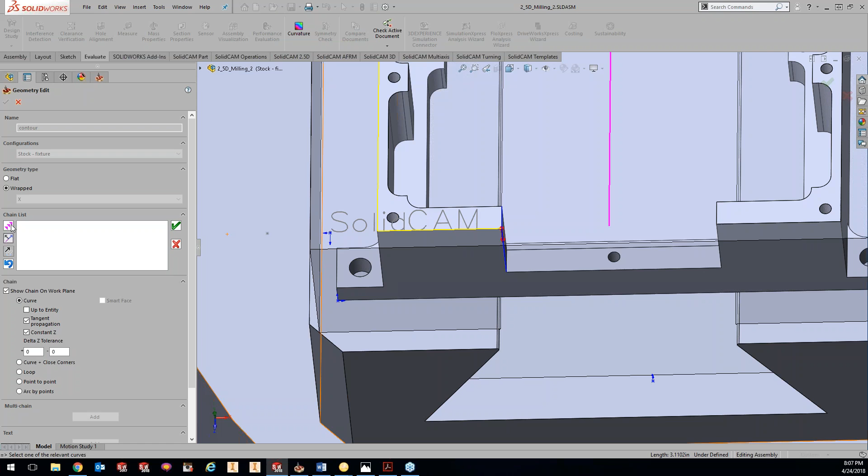But now, let's say I don't want it to go this way, I want it to go down. Easy enough. We can come over here, click the change direction, or you can hit F7, and then it's going to change the direction for you. And then you can go back and hit F6, and it's going to go through.

So you can kind of see that arrow direction. You're following that more than anything. So I'll just change direction again, continue through. So that's one way to go about it.

Stopping you real quick there, Kevin. One of the nice things about having hotkeys is if you do have one of the nicer 3Dconnexion mice, you can actually map those hotkeys, the F6 and the F7 button, to these customizable buttons on your 3D mouse.

That way you can go through and rotate your model with that 3D mouse and start selecting your geometry as you go. So it's a nice feature that I've mapped on mine, and something you guys may want to play with as you program out your parts.

Yeah, that's a great point, because time is money when it comes to programming, and the sooner you guys can go through things—just like when you guys are creating your SolidWorks models, those hotkeys really help you out speed-wise. So definitely map those out.

I'm currently running the 3Dconnexion SpacePilot Pro.

Greg, I think you're running—which one are you running? Are you running the Pro? I think I'm on the Space Pilot First Mate. First Mate, okay. So yeah, definitely you guys set that up on your buttons, and I know pretty much everybody in here has the 3Dconnexion 3D mouse.

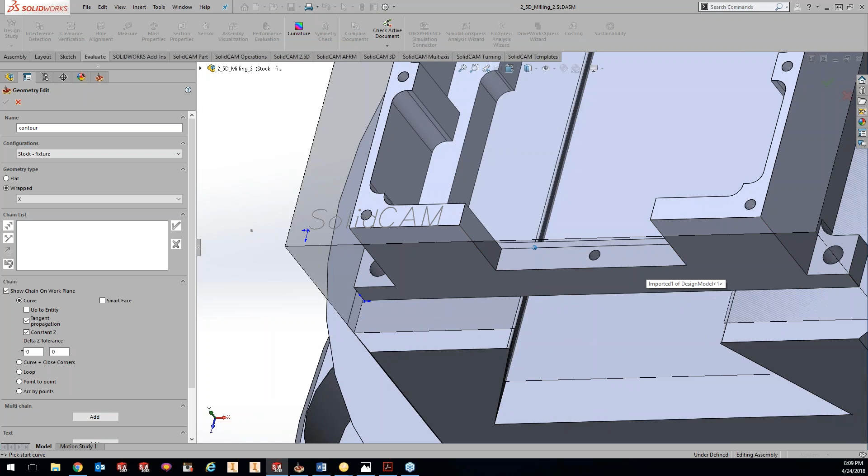Okay, so maybe we want to change the direction of this cut. By default, let me just kind of start over here. I got ahead of myself. So let's say we want to chain this right here, but I want it to go a certain way.

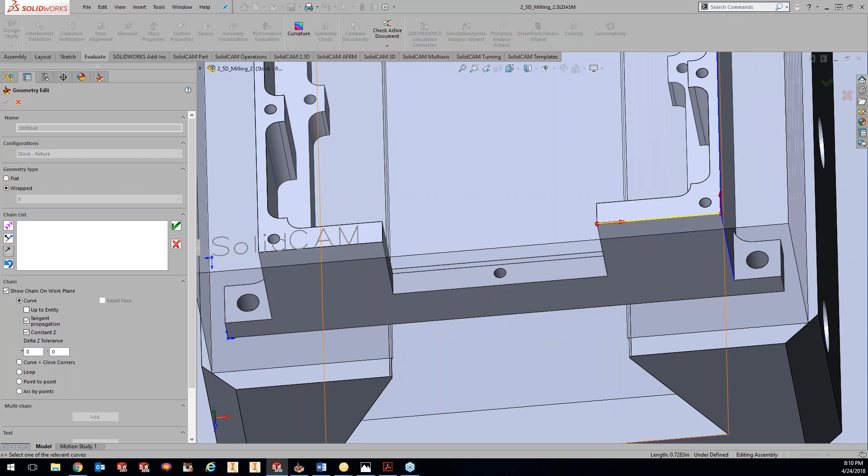Well, if I click from center line over to the left, my chain is going to go to the right. See how our arrow is going to the right? Let me just undo that. Now if I click more to the right side, my chain's going to go to the... maybe not, my chain should be going to the left. In normal situations, it would be going to the left. Let me hop out of here real quick and get everything refreshed. All right, we'll hit new here.

Okay, so if I hit over towards this way, there it goes. My chain will go left for me. So it all depends on where you click.

Now let me delete that real quick. Let me turn off this tangent propagation constant Z. Let's say I accidentally clicked the wrong direction. So this button over here, the reverse button, will reverse your toolpath. So if we hit F8 or click the reverse button, you'll see how my chain direction switched over.

Now, chain direction does not matter with iMachining, but everything else does. So you always want to make sure your chain direction is going the correct way, because that is the way that your end mill and face mill and all that stuff is going to follow.

And then we also have the oops button. So you can hit the undo button or hit the backspace, and that will just undo that chain for you guys. So, any questions with the chaining options over here?

All right, so let me chain this one around here real quick. Let me show you one more thing in here.

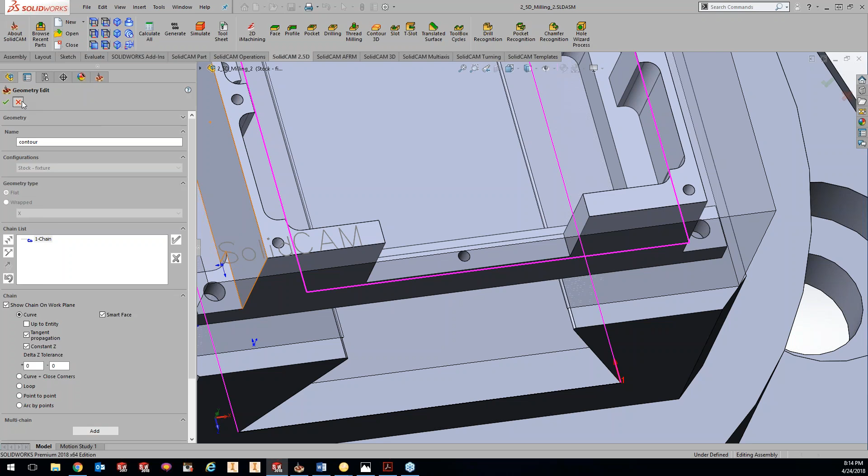So if you guys have a sketch, let me do one up real quick here. Sorry guys, I should have had this a little bit better. So let me zoom out here,

and let's just do a sketch. Let's do something like that. Exit sketch, and we'll do a pocket, new.

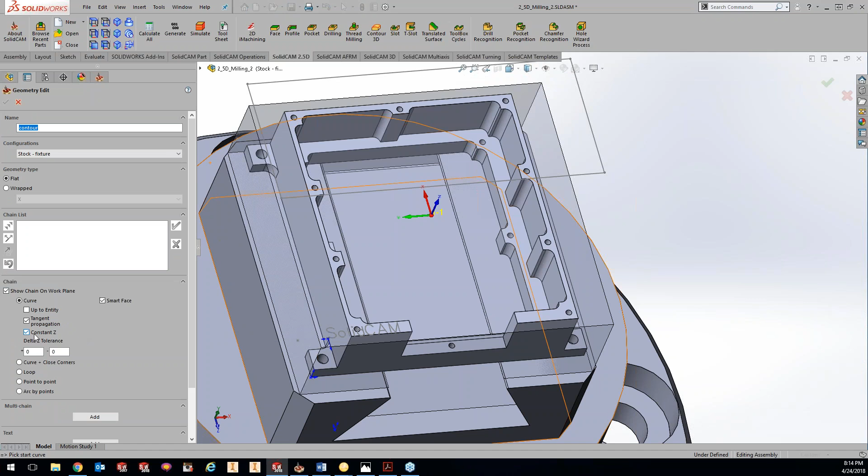So if we do something as point to point. Now this is like if it's missing geometry and you just have points, and I'll talk about the point to point. But if I come here, do point to point, and sorry guys, my mouse just fell apart. The little trackball had rubber on it.

Okay, so go point to point. We got a chain there, chain here, chain here. So now we have our closed chain, but if I come in here and do mark open edges, since I've picked a sketch, I cannot mark those open edges at all.

So what you guys can do is, if you have, let's say I want this one marked as open edges, there's 2 ways of going about that. We can mark the entire chain as open and then come back and do the wall like I was just talking about, or we can use the select entity, the from-to entity, so from here to here, I want it open, and it will open up that slot for you guys. Just one kind of little trick right there, using sketch geometry with point to point.

Okay, so I was waiting for Andrew to pop in, but I think he must have forgotten about us tonight.

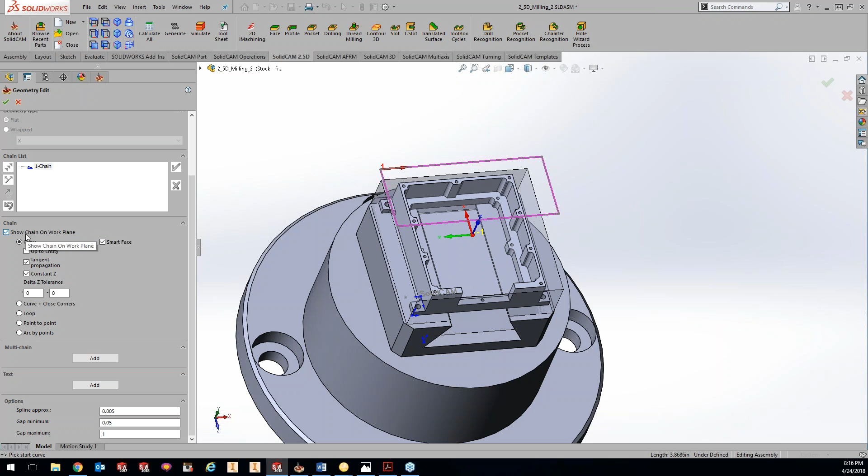Okay, so now as we're going through it, let's focus on the chain section right here. So this chain, show chain on work plane. What this is going to do is produce - let me just delete this, yes - and we'll chain this guy right here. So what that is showing us is the chain up on top in purple.

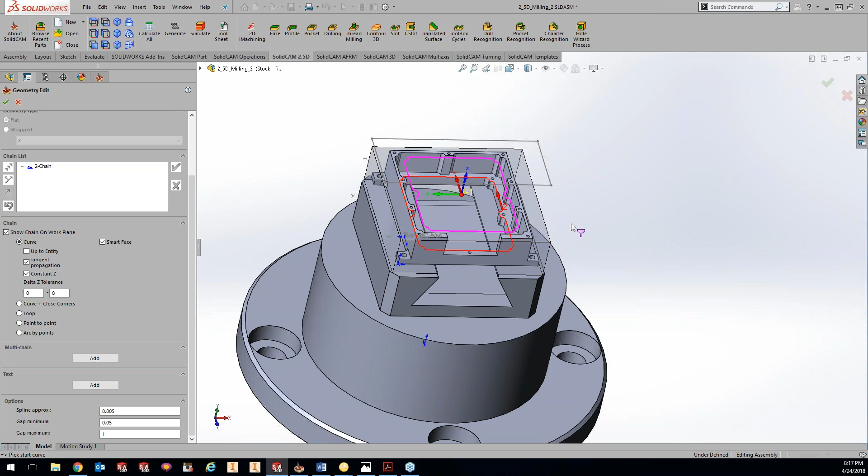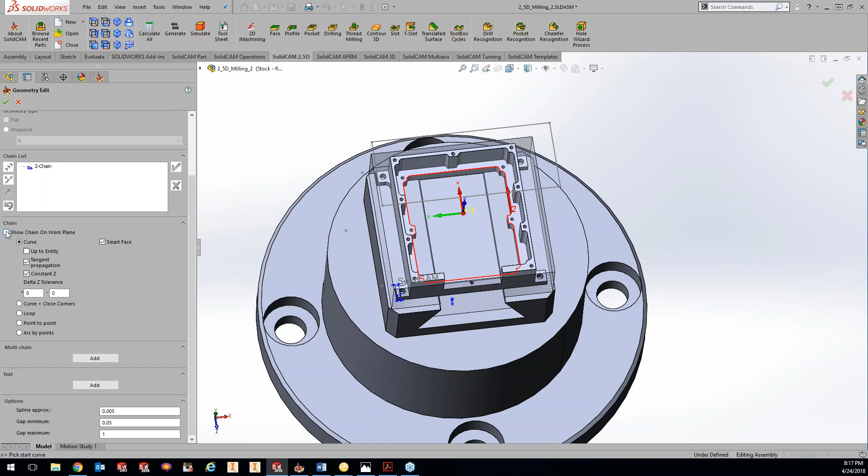Now, this will throw you for a loop. Personally, I don't like it, but it shows you the plane there. And the only reason why I say I don't like it is if I come and mark open edges on this, and if I'm looking straight down on it, clicking that mark open edges, it's still showing pink when the open edge would show black. So this is something you guys can turn off just on this particular case. I can come in here and turn it off, or you guys can go to your settings and turn that off so it never comes on for you guys.

So just keep that in mind. And if you don't like it, just turn it off in your settings. Let me hop out of here and show you guys in the settings.

Tool, SolidCAM. One of the places where show chain on work plane really comes in handy is when you're working with 3D geometry, because you want to see what that projection of the work area is going to be, since it may not present itself as well when you're working across 3D surfaces. So each thing has its place, and it's up to you to determine what works for you guys.

So here's the defaults for your geometry. If you open up your SolidCAM settings, come over to the geometry button, here is where all your settings are for that field. So let's say you want to change the gap minimum or maximum, or you don't want to show that chain, you can just uncheck it. As you're picking geometry, sometimes by default the tangent propagation is turned on and the constant Z propagation is turned on. Maybe you don't like that - you can turn that off right here.

Smart face settings, which we're going to cover next - you can do it for pocket and iMachining, or we can actually do it for profile as well. The auto depth and shift positions really don't pertain to the geometry picking itself. So if you don't like the show chain on work plane, you can just unselect that as well.

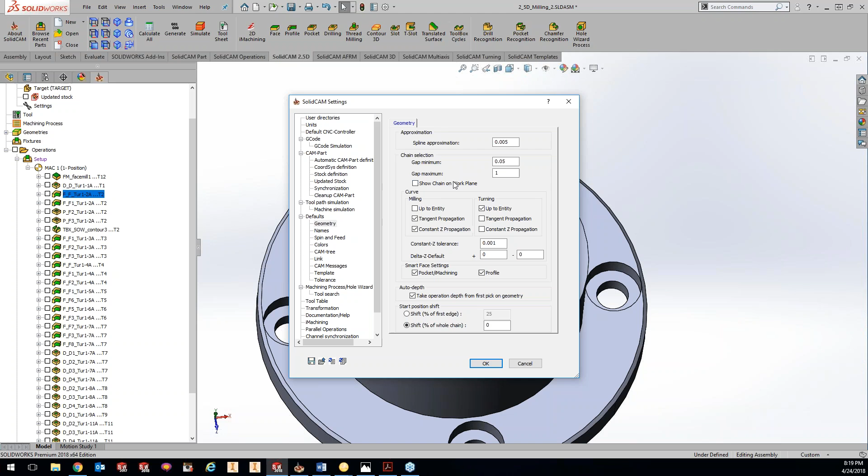So okay, let's get back in here and go to pocket, new.

Okay, I'm going to throw something out at you guys here. As we're doing these night classes, I kind of think I know the answer, but I want your guys' take on it. And this has nothing to do with our geometry - I just thought of it right now, and Greg and I were talking about it last week. As we're going through this stuff, let's say we're doing a night class on pocketing - would you guys be interested in, after I show you how to do a pocket on a certain cut or a certain cut style, seeing that live cut on the machine as well?

Absolutely, we've got an absolutely yes. Okay, so for those of you that don't know - look at that, a resounding yes. On a CNC, yep, that's right, Ronnie.

So we have that small little desktop machine. I'm going to see if I can get that transferred over from Scott's shop over to here and see if we can start doing that going forward. Scott is really attached to that machine, so we'll have to play that one by ear. But I think what I'm going to do, guys, is email you guys, and if I can get enough yeses saying we'd love to have that, I can send that. I can use that fuel for the fire, you know what I mean?

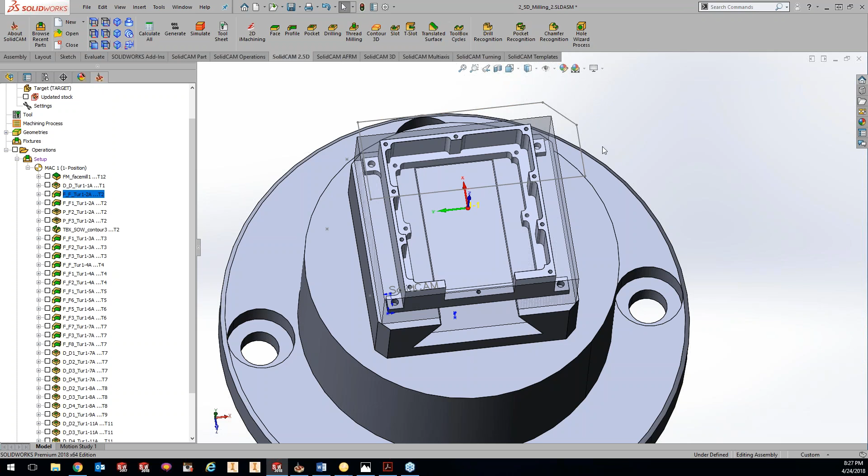So what we can do is, let's say, we want to square off that corner. Let's do profile here, new. So we can do our curve plus close corners, and I should be able to grab this chain right here. I'm going to reverse it, and I can click on this chain, and it's going to pretty much put that at a 90-degree angle for you guys.

Now, if this line is not 90 degrees to it, it will do an arc in there for you guys. I don't have a real good example of that one, but it's just going to throw an arc in there based off of how everything's put together, if it's not 90 degrees right here. This is one that, ever since SolidCAM 2007, I haven't even touched. Not a real popular one, but the option is there for you guys.

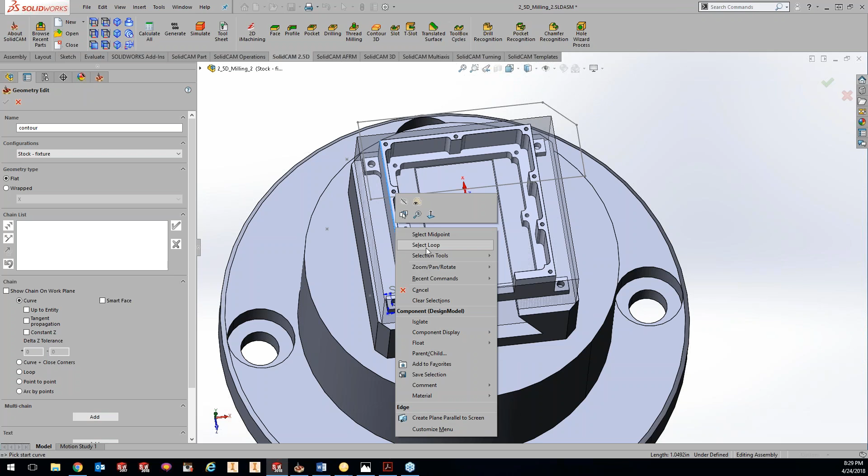All right, so let's reject that chain, and let's go to loop. For those of you guys that know SolidWorks, when you're doing stuff in SolidWorks, you have the option when clicking on something to do loop inside there - select loop right here. That's exactly what we're doing over with SolidCAM.

So what you guys can do is we can click loop, and I'll just click this chain right here. Now it's telling me that I can loop this face right here that's highlighted in yellow, or do I want to loop and chain all the stuff in blue? So let's say if I wanted to go with the blue, I can just click on one of the blue lines, and it's going to chain it up for me. So it's just grabbing that entity you've chosen, and it's going to go either that front face or the top face for you, looping that geometry around.

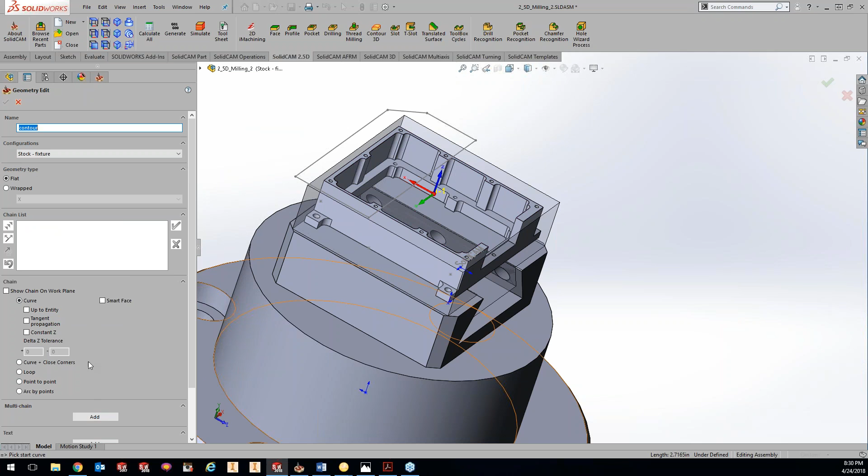Okay, let me delete that here. Point to point is one that gets used a lot - missing geometry, maybe we need to do a gap in the line, kind of like this front face right here, instead of coming down and over, or if this bottom piece was actually missing, I would have no way to connect the dots.

So two ways of going about that is I could do a sketch and just do a sketch line over here, or what we could do is I can click on that, and then I can come over here and go point to point, and I can just hop right over it. And then now I can go back to curve and grab my geometry going all the way around for us. So real easy to use, and it's just basically filling the gap for you guys.

Now, you will be able to mark that specific chain as open. So you can come over here - I didn't do it in pocket, I did it in profile - you can come over here and do mark open edges, and this is where you'd use the from-to. So we'll say from this line to this line over here, I would like that chain to be open.

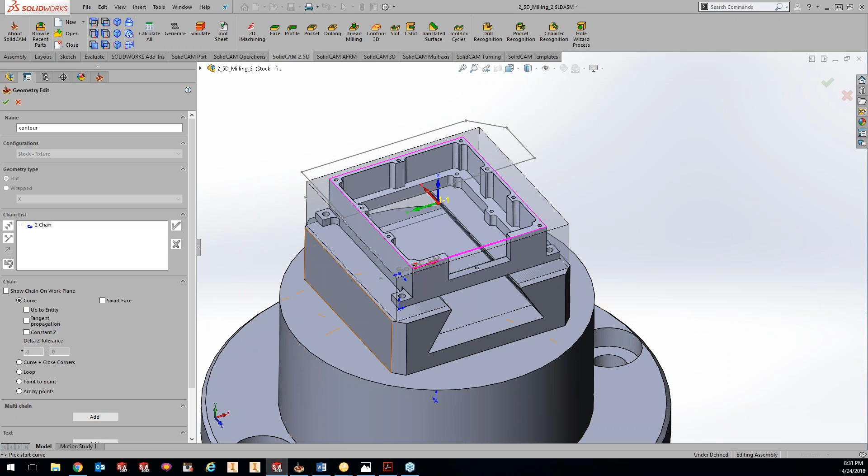Here's another tool I personally don't use very much, but I want to show you guys. If you have points, it's basically like your spline tool inside SolidWorks. With the spline tool you just click the points and the lines connect themselves. So if we come over here and do arc by points, I can click that point and that point, and it will throw an arc in there for me. It's just connecting the dots using an arc.

Real simple, easy to use. Any questions with this chaining stuff right here?

Okay, let's scroll down here. Let me reject that chain. Now here's another one I like using quite a bit, the multi-chain. Multi-chain is for doing multiple chains, and they have some nice features in here.

We can do by edges, so I can click and it will find the edges for me. I can use text, and I can use faces. The one I use quite a bit, especially for guys that do a lot of engraving, is the text portion. If I turn it over to text, you'll see the little A icon over my mouse cursor, telling me I'm hovering over font geometry inside SolidCAM. Then I can just click, and it automatically grabs all the geometry pertaining to that SolidWorks font or text.

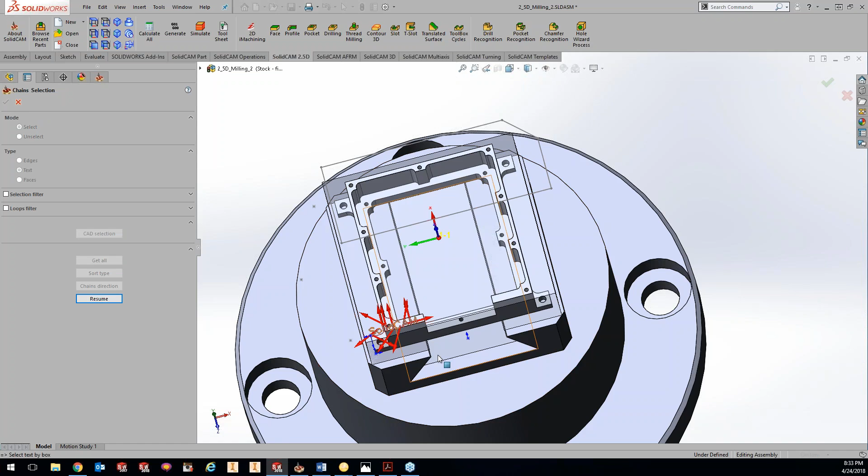There are a couple different options over here as well. You can sort your chains, do chain directions, and it will show you or let you change the chain directions. We can change the order, all that stuff right here. There's also the view chain button, so you can show where those chains are going and the direction they are going. You just hit the green check mark, and as soon as you hit it for that multi-chain, it will show you the chain direction as well.

So that's just some stuff in here to get you guys more proficient with the chaining portion of the software. What's nice about the multi-chain too is you're not locked into that mass selection. You can go back through and edit these chains or delete them if you don't want to engrave the entirety of it. If you want to skip out on a certain chain, I can come over here and delete.

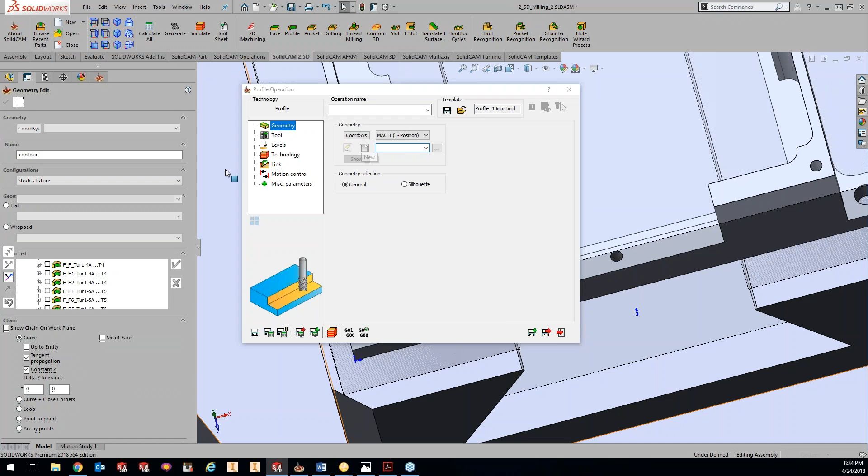Why am I not able to delete? Normally you can, let me get some fresh... Greg, are we going to make you a liar? It's looking that way. It was bound to happen eventually.

So now we should be able to... no, I could have sworn if we click on here. Okay, so you won't be able to right click on it, but you guys can come over here and just hit your delete key and say yes, and it will delete that one out of there for you. I have to look into why we can't hit the delete button right there.

We can do it with the entire thing. This works really good if you're doing serial number engraving, where you need to input a macro that's going to be a serial number counter, but you want to have that placeholder modeled in. You'd be able to select that entire text and then deselect the numbers that are going to be involved in creating that macro. It works out pretty well for those guys.

For those of you wondering what the best font to use is, I think both Greg and I's personal favorite is the DPS Schrift. It works really good just for a single line serial number font. You can get any font out there, but that seems to be the best one - very clean, very fast, easy to use.

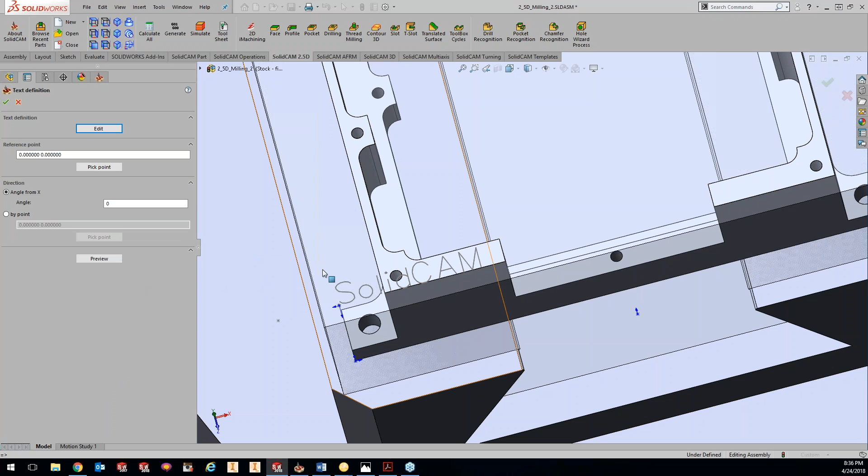Now, for those of you using Inventor - you guys in Inventor cannot do a geometry like this, you can't just do a single... boy, I can't think of the word... single font geometry in here. So what we've done is we've added in this text box right here. You can actually come in here and basically do the same thing. What it's looking for is a reference point - where do we want that. So we can do a pick point, and tell it to go to a certain area.

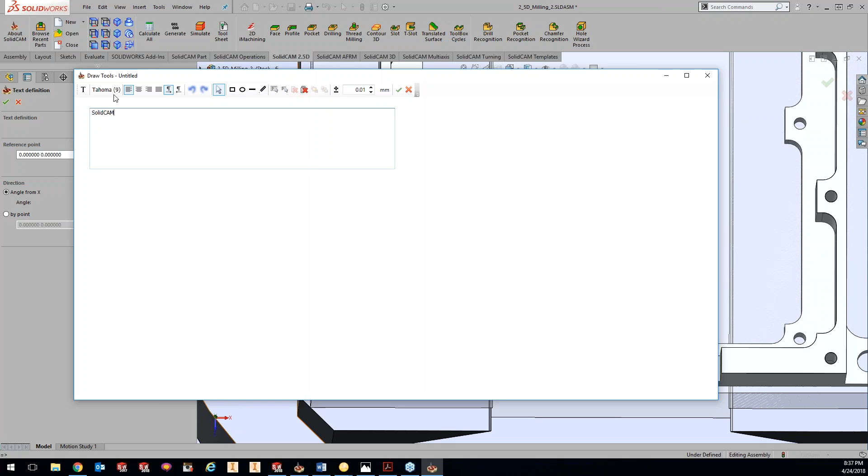If we do the edit text right here, we click and drag it, so we have a window and do text - oh sorry, I got to hit the text button. Now I can come in here and type SolidCAM, and we can change the font as well - DPS Schrift, hit OK.

And here's how you can change the size, so we make it larger or smaller. And we'll do pick point, and use this point right there.

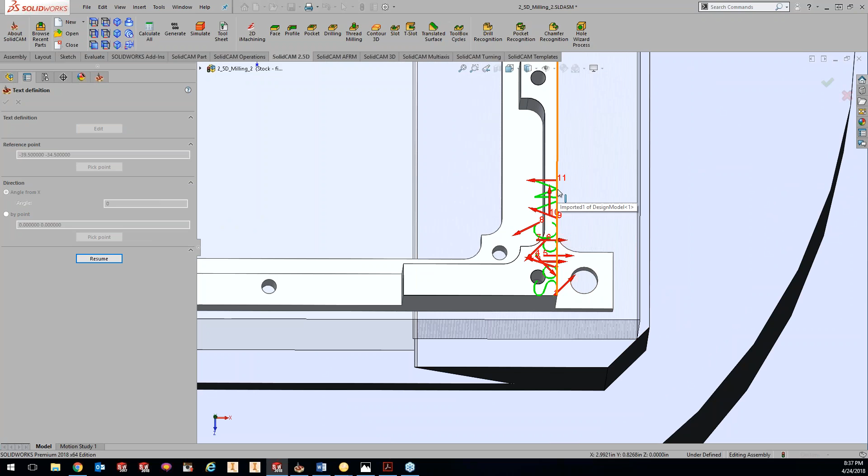And we can do a preview, and it shows going up this way. Now, if we want to change the angle of it, we can come in here and say 90 degrees, or we can flip it around.

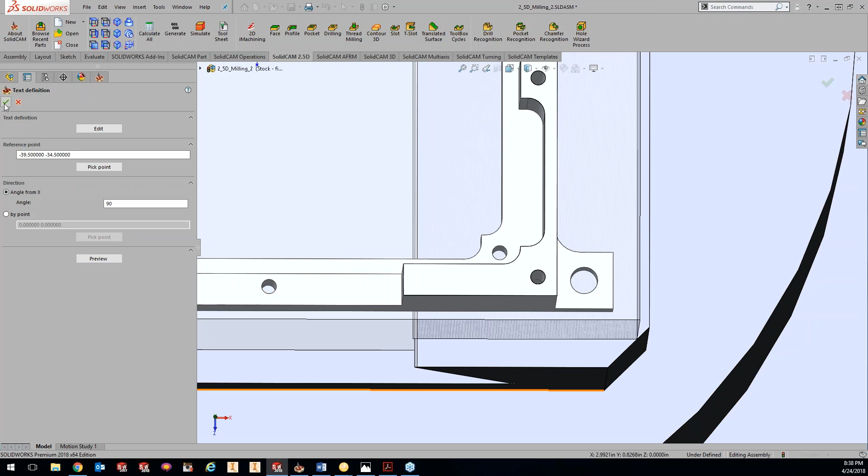So all the stuff that you guys have the functionality inside SolidWorks, you guys hang on a second, sorry about that. So you guys can flip it around and pick whatever geometry that you want.

Okay, before I'm losing it here, the name of that font is DPS Schrift.

Okay, so now the spline approximation. Now this gets a little confusing sometimes. Your spline approximation is the tolerance of between a spline between points. I do have a couple screenshots I want to show you guys here representing what's going on right here.

So as that spline is going around, with splines they can go every which way. You guys can actually set up a tolerance for that and move those around. The spline approximation, this is one that, the default setting, I found out to be very good. It's completely up on how the geometry is created from the engineer or you guys. But from what I've run across over the years, this is not one that had to really do a lot of changing with.

Like I said, if I give you guys the full definition here, let me just find it real quick. So this field enables you to define the spline approximation tolerance for the chain selection. So the spline approximation, like I said, it's just the tolerance going back and forth to get a more smooth or more transition from point to point on a spline.

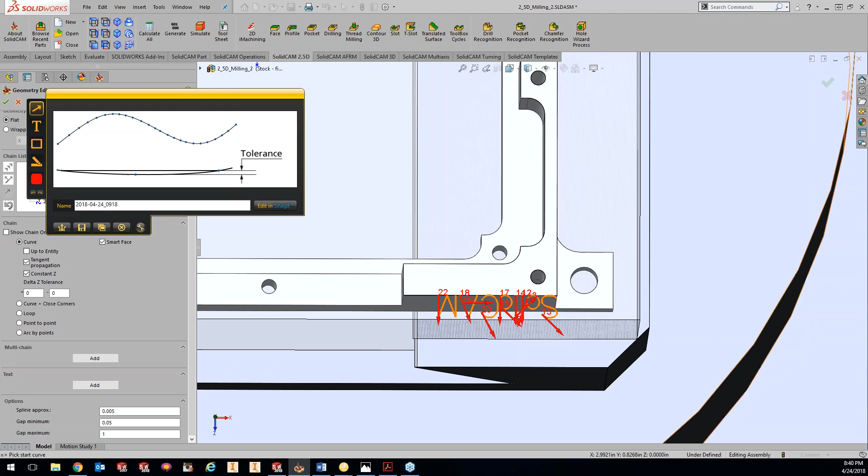And give you a little picture is right here. So, you know, maybe you have your spline, it's a little bit farther down, but we're trying to make a nice sweeping arc, and that is the tolerance that is being left there. So hopefully that makes sense.

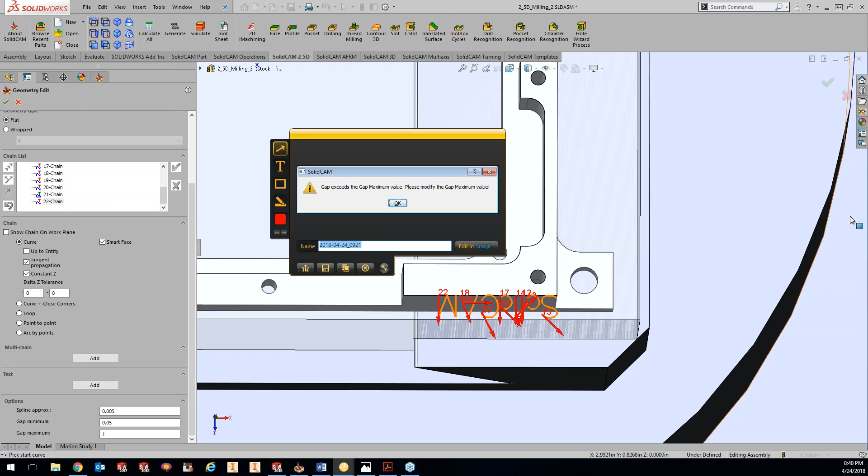Okay, so now down farther. This is one that does play into factor quite a bit. How many of you guys have gotten this error right here? Gap exceeds the maximum value. Please modify the gap value. Or what comes along with that is this one that pops up right here.

So what this is saying right here is, let's say as we're chaining right here on this corner, if there's just a little bit of a gap there, it's going to ask you, do you want to close the gap? Now, if this gap that you have specified down here is too large, it's not going to close it, and that's when we're going to get this error here.

So if you want to close the gap, you guys can make this number larger right here, and that will, the minimum and maximum, we can make these larger or smaller. That will close off that gap, or another way of going about that is doing a point-to-point if you have to zoom pretty far in there. So if you guys are getting these messages, that has all to pertain down right here.

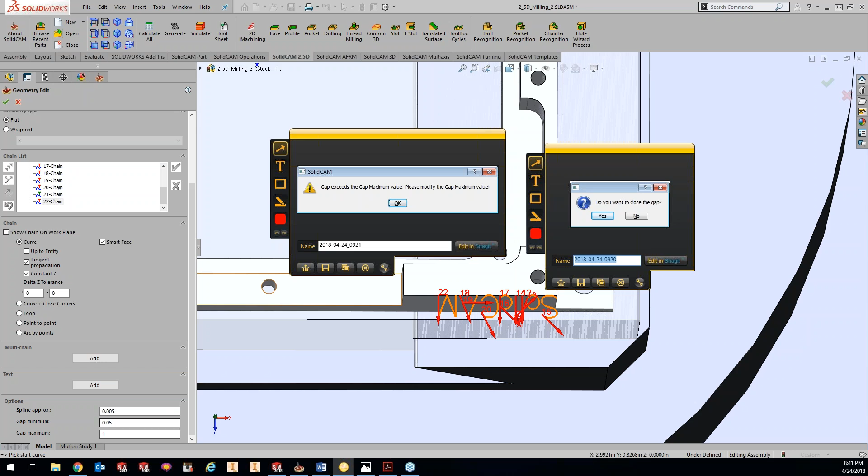Now cancel out of here, and let me cancel out of here and just get fresh. So let's say our gap minimum and maximum are set a little bit different. So let's do a gap maximum of 10 thou and a gap minimum of 1 thou. So we have these set up.

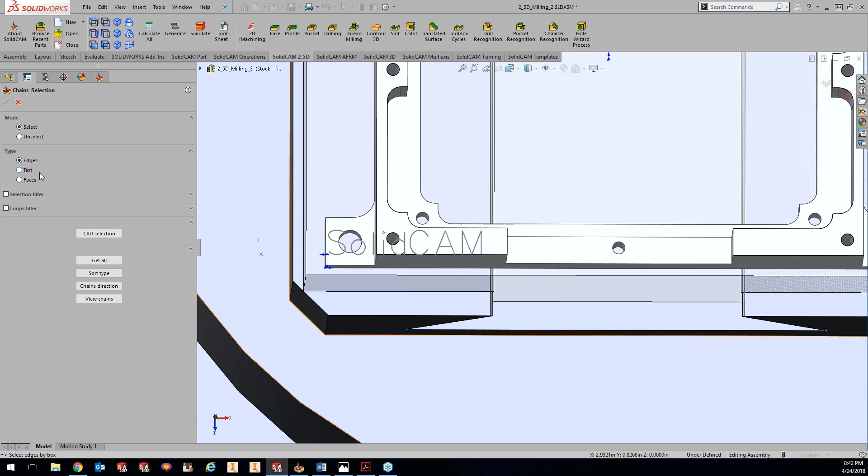So here's what's going to go up is there's gaps in all kinds of geometry. But now if I go to my multi-chain, we'll just do text again. We now went from 5 chains to 75 chains. And so what it does is it's breaking it up into each individual chains for you guys.

Now that's all to do with our numbers down here. So basically what I told it is, you know, anything that has a small gap in there, mark it as a separate chain. Hopefully I'm kind of explaining that for you guys to understand. Like on this O, it's breaking it up, I guess, into line segments versus having one fluent chain going all around.

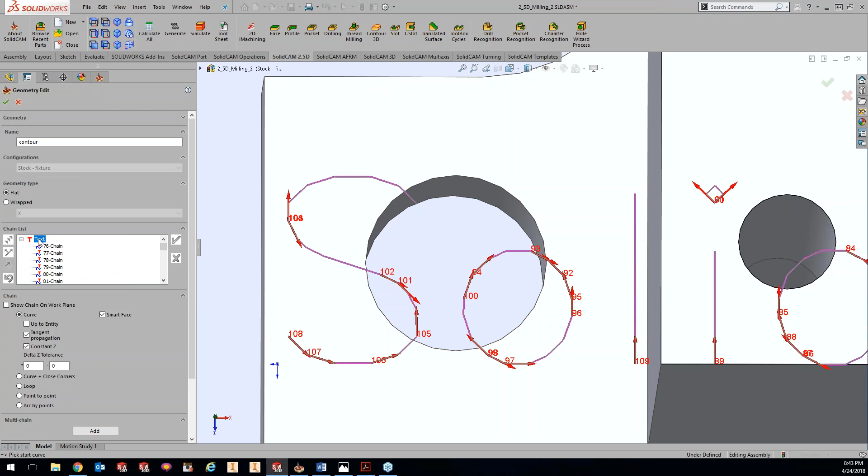So if you guys are getting this, definitely come over here and let me delete this again here. And we can do a gap minimum of, let's just say, 10 thou and 100 thou. So now we should have a nice smooth one line for each letter. Nope, I got more chains now. Delete. Oh, I think I had 40 in here.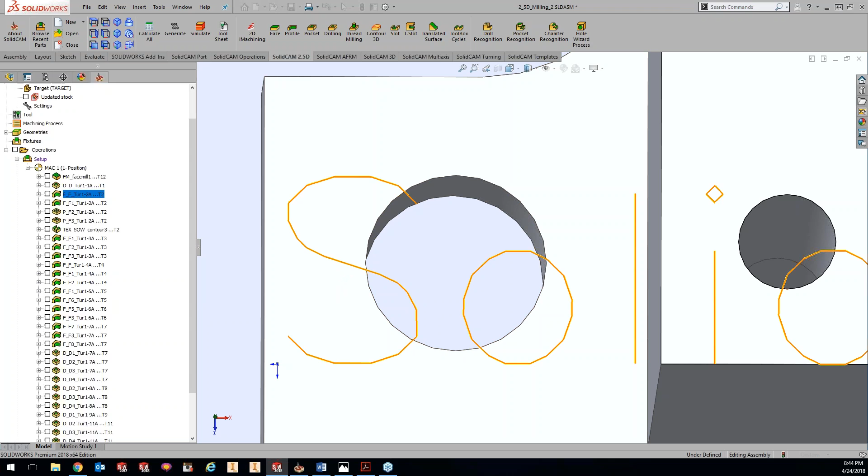There we go, now we should have one single line, it's just added to my list. So that's the way to clean up and get one single toolpath versus having it chopped up into a bunch of different little line segments for you guys.

Okay, any questions guys? Or Greg, is there anything I missed or you want to add in? No, it's looking pretty good. Not a lot of questions coming through the queue. You must be explaining it pretty well, or everybody's going easy on me tonight.

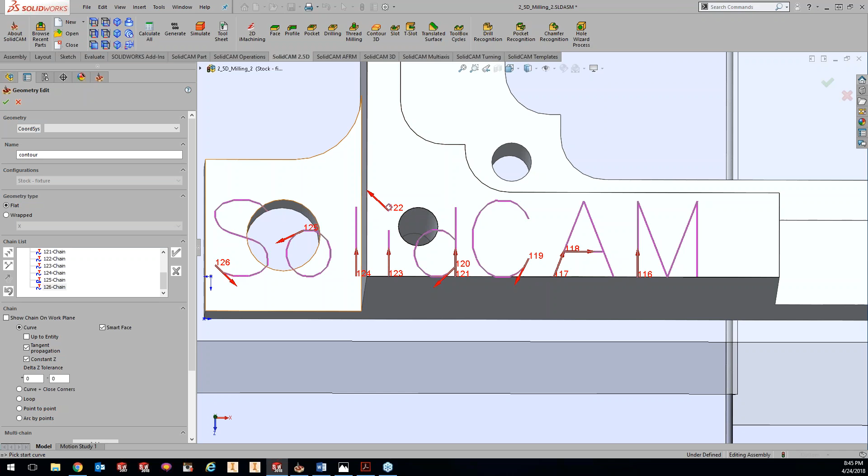Let's see, what is the name of the font? We had that question pop up. If you guys are in SolidWorks, we'll do a sketch and just say 'test' here, uncheck this use document font, go over to your fonts and type in D. It's usually the first one that pops up, so the DPS Schrift single is the most machinable way. If you guys are looking at the engraving stuff, we did do a night class on engraving as well, so check that video out if it interests you.

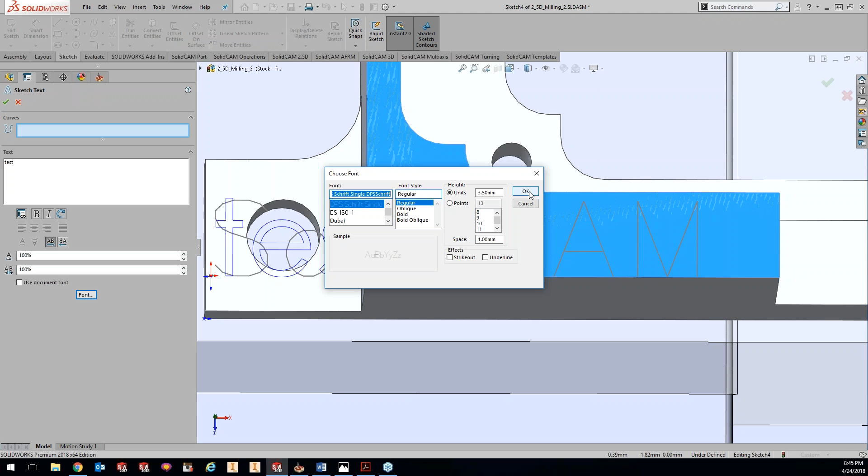And the font is included with the SolidWorks install, so you guys should have it with every installation of SolidWorks. We should probably put the name of it in the video link too, on the YouTube channel, for the people watching on YouTube.

Doing great, perfect. All right, I don't see - Ronnie, you got no questions for me? Just answers tonight, I know.

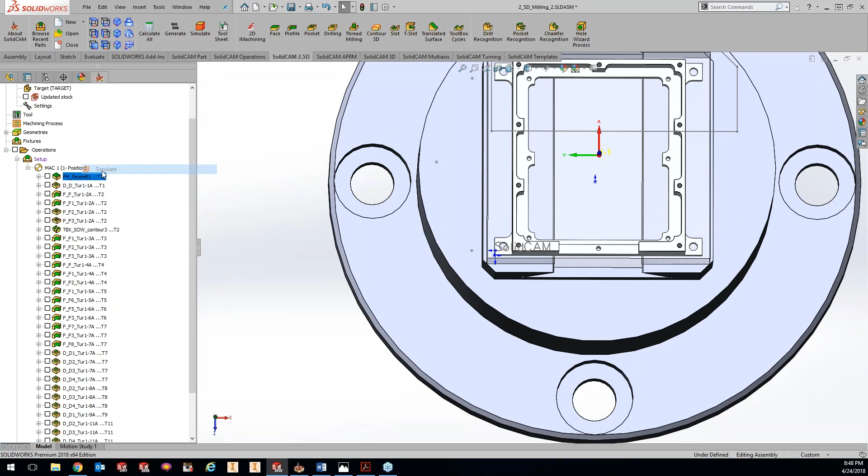Let me go to SolidCAM. We are doing webinars for the night class - oh, the Solid Verify stock. So how to utilize that Solid Verify stock. What I'm talking about is, if we go in here, we'll do a simulate Solid Verify.

Wow, how to - spoiler alert - how to save out and load up that stock. So it'll probably be a shorter night class video, but just going to show you guys how to work with that STL stock, importing it and exporting it out.